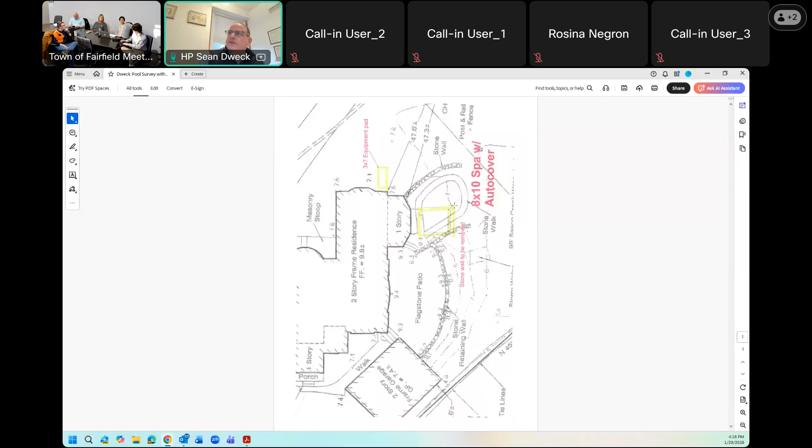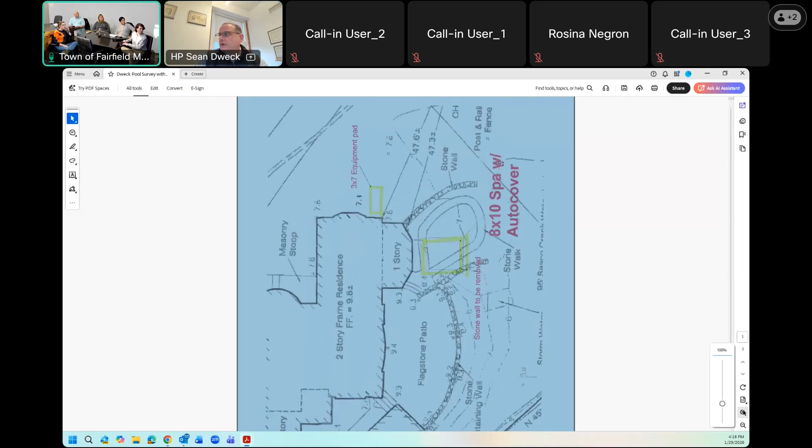The proposed location is the box that's here in yellow. I don't know if you can all see that—maybe enlarge it a little bit, and also flip it 90 degrees? I can do both. There we go, thank you.

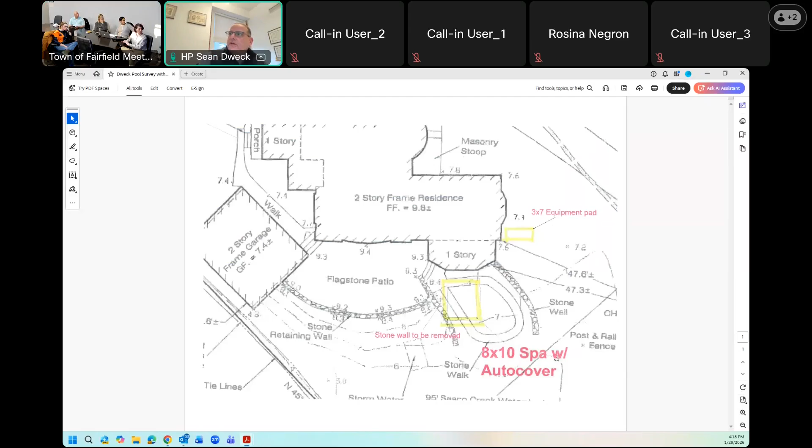Okay, that's better. So this is the house here. This is a flagstone patio, which is pre-existing. Then there's a stone wall that's maybe a foot or two here, and two stone walls, one here and one here. This is an open grass area, and all of the area over here is open grass. Alongside here is a fence that was before the commission maybe a year or two ago—it's a white wood fence that goes all the way up to the curb, basically. And then this is Pequot Avenue over here.

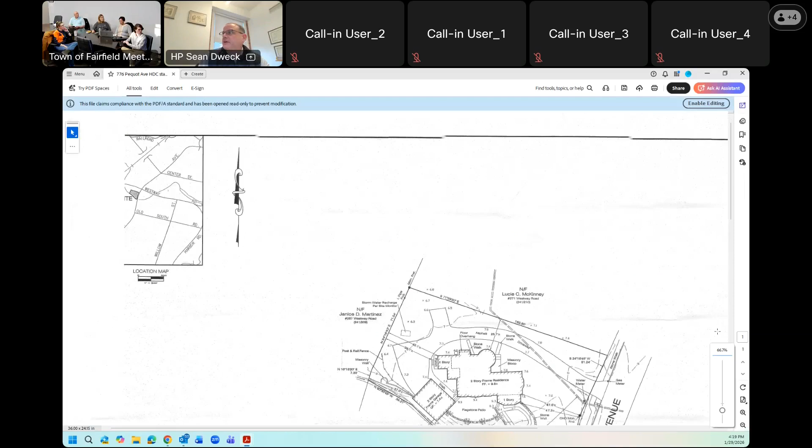That's the map that's here. I also have, just for frame of reference, the actual survey that's on file with the town, to kind of give you an idea in terms of where things are. So this is where the proposed pool would go, this is where the existing fence is, and this is Pequot Avenue over here.

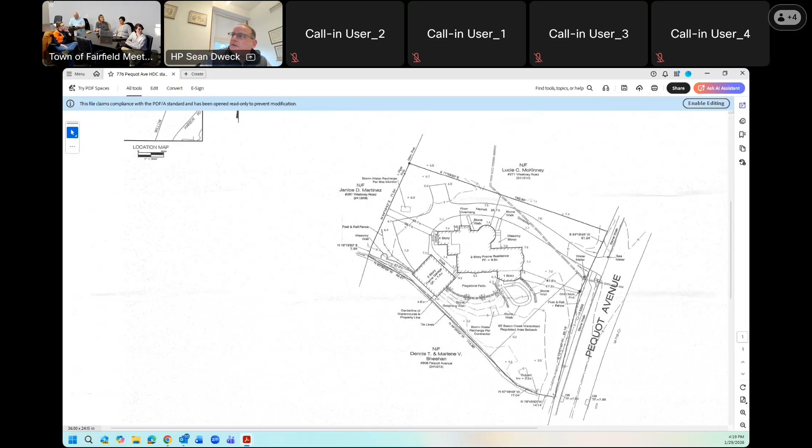Alongside Pequot Avenue, from the start of our driveway all the way up to the end of our property line, is completely covered with large evergreen trees. And then going back to the other drawing, the proposed pool would go here.

It would have an 8x10 spa, they're calling it a spa, with an auto cover, completely rectangular. The proposed location for the equipment pad would be over here, which is covered by shrubbery. As we have more plans prepared, that would all be part of the plan.

We've reached out to the different departments within the town—planning and zoning, engineering, obviously to you, and the building department—just to get some preliminary information about what hurdles we may need to overcome in order to have this done.

It appears that we need to have a minimum of a 40-foot setback from the property line along Pequot Avenue. I did a rough measurement myself, and it looks like we will be within that. But once we have the actual drawings from the surveyor, the engineer, and the pool company, we'll be able to confirm that. If not, they said we would likely need a variance for whatever the difference is.

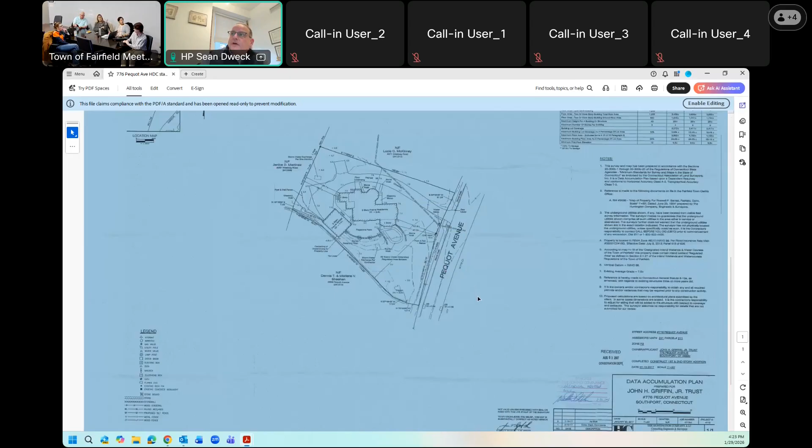One of the comments I received was that it can't be visible from the street, and I don't think that would be the case here. But obviously we can't take landscaping into account, so we have to consider: can we see the pool if those trees weren't there? The short answer would be yes.

What we can do as part of the proposal is have the wood fencing come out as far as necessary so the pool would not be visible from the street if the trees were not there. So you'd extend the fencing that's by the bottom of your driveway down Pequot?

Yes, you're correct. We'd have to talk with the landscape architect or whoever would design it. But I think aesthetically, for our purposes and the town's purposes, any fencing we put up would be closer to our property so that when anybody's walking down Pequot Avenue, all they really still see are the trees, but the fencing is there. So it'd be behind the tree line—yes.

So that was Darren Raymond Locke asking questions. Jim, do you have any questions or comments? No, I'm good, thanks. Maura, do you have anything?

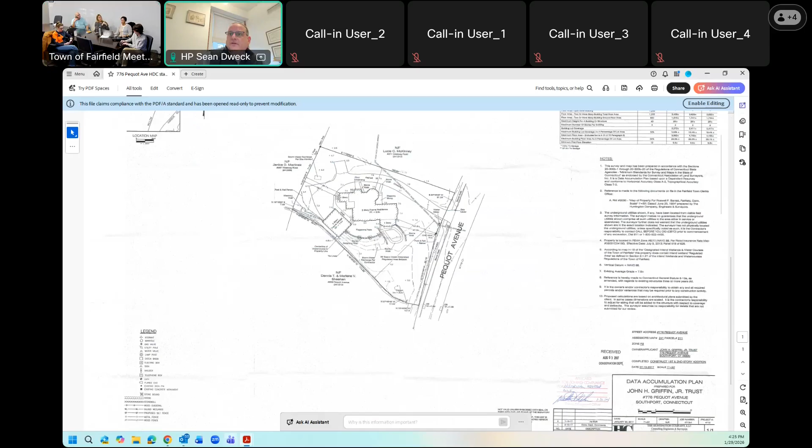If we go back to the original drawing with the colors on it—this area here of the pool is closest to Pequot. My measurement would be that from here, the closest edge of the pool to Pequot, up to before the sidewalk starts on Pequot, would be 40 or more feet.

I say that's an estimate because I have to leave those measurements to the experts, but when I went out there with the long rolling tape measure to see if we'd be within that 40 feet parameter, it seems as though we would be. That's the part of the pool closest to Pequot.

And the fence that's there is like a stockade, the 6-foot one. Yes. Would it be the intention to continue the same type of fencing?

Truth be told, I don't know. I don't know whatever requirements you folks have, we'd want to comply with, but I don't know aesthetically what would look best—whether it would be the same type of fence continuing along, or maybe something different. So I don't know is the short answer.

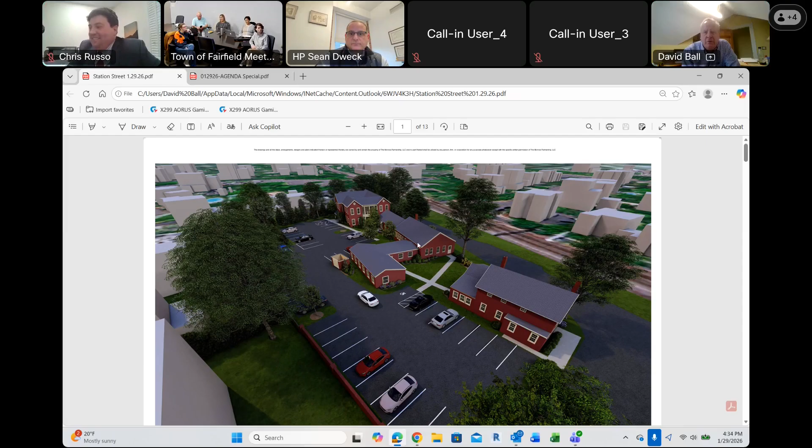Starting with the building, there were comments about the front entrance - it was a double gable. Actually, I've got a close-up view of that. We reconfigured that part of the building so now it's a single gable, and also introduced some of the other elements we talked about. For example, the windows have a sloped - I'll zoom in a little - I apologize, my mouse is acting up - but we have the windows with what I'll call a gable head to it, look carefully at that.

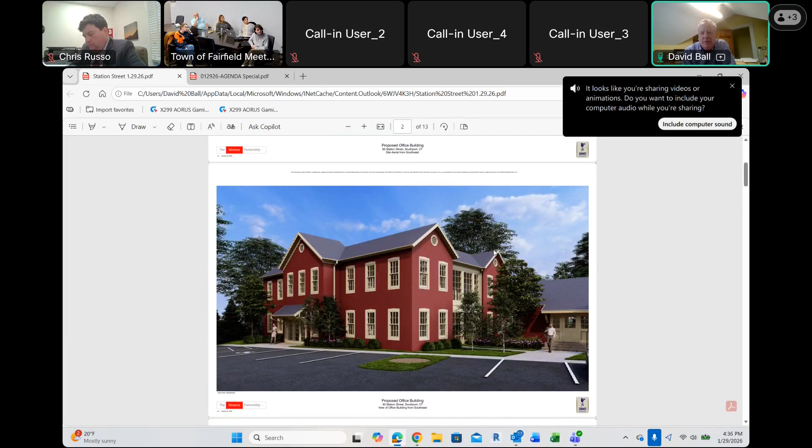And then we added gutters and downspouts, exterior lights, and the circle vent. The one thing I'll point out is at the front entrance we did add a trim piece similar to the original building as it's been reconfigured over the many years at just that part of the facade. We did not do it on the sides of the building - we'd be happy to, but we actually like this. The proportions are good, they feel a lot like the original building, and the side feels a little more barn-like, which was some of what we were dealing with in the prior design.

So this gives you a sense of the overall building with the revised front entrance. I'll scroll through the rest of the presentation, which is very similar to what you'd seen in the past - the various views around the building. The footprint of the building, we kind of pushed and pulled that one element, so it's exactly the same square footage as before. We added a few historical pictures - we dug up the pictures from the Northrop brothers, which is the one on the left here, and then some of the others that we handed out in the meeting the other day.

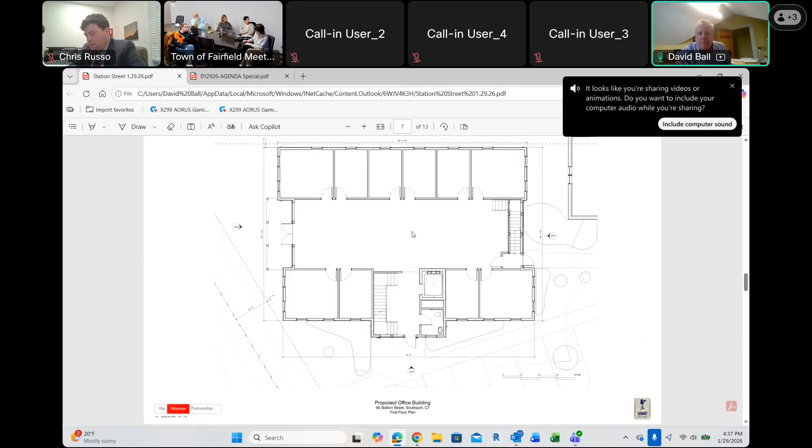And then there was - so here's the floor plan. This is all squared off now. It really doesn't change the floor plan in any meaningful way. The roof plan, the same. The elevations - this is the front entrance in straight elevation. Bear with me with my mouse, but hold on - so that's the basic, pure proportions of that front entrance.

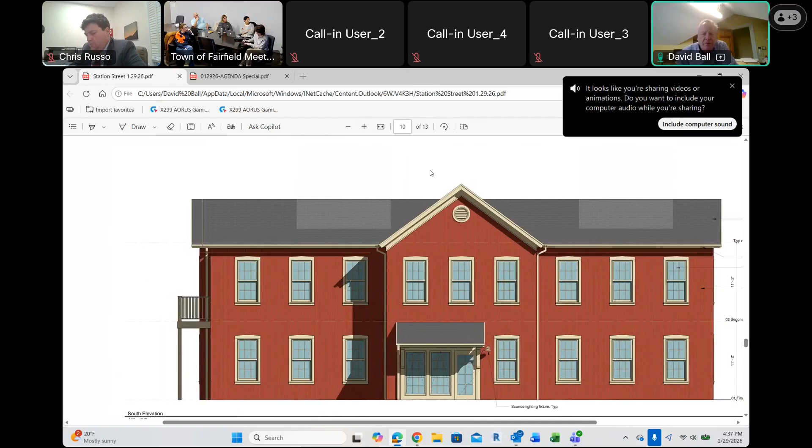And then the other elevations, aside from the windows and the gutters and a few other things, have not changed much. We did add a page of what the dumpster enclosure will look like, and it's really meant to be in character with the remainder of the site. So it's the same vertical painted cedar siding, painted wood trim, kind of barn doors for accessing the material.

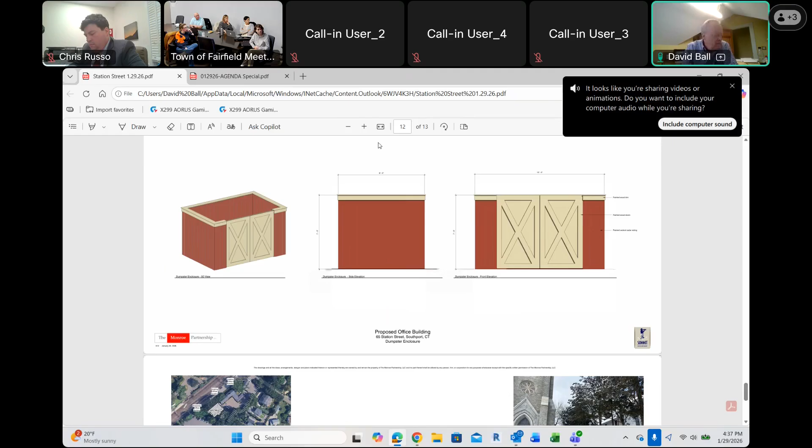And then there was a handful of other questions. One was, how does this compare to the church height? So we went out to the site. The photographs on the right were taken roughly last week. You can tell because there's not a foot of snow on the ground.

The height of the church, the main gable, not the steeple, is approximately 59 feet. The height of our building, per the zoning regulations, midway up the gable, is 26.4 feet. So it's roughly half the height of the church. And if you add the full height of the gable, it's another 4 feet. So it's 30 feet versus 60 feet. And we just don't believe that this will be visible from the street.

We took a picture in between the church and the house to the side towards the site, and even in the wintertime, there's a number of evergreens there. I know you don't consider trees as far as you want the architecture to be right, but we just don't believe this is an issue.

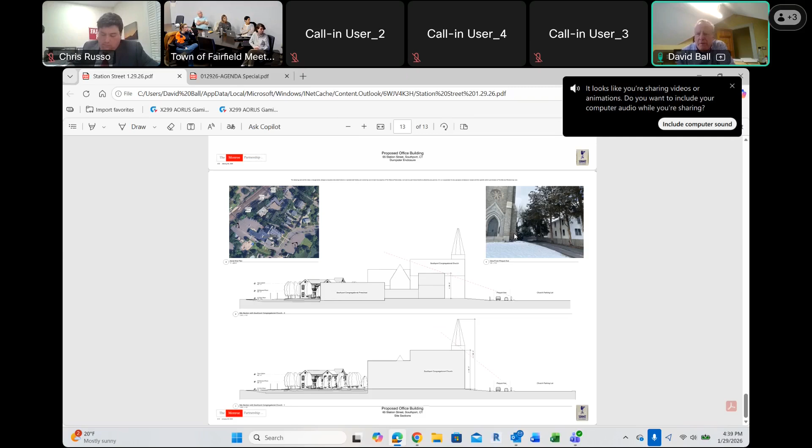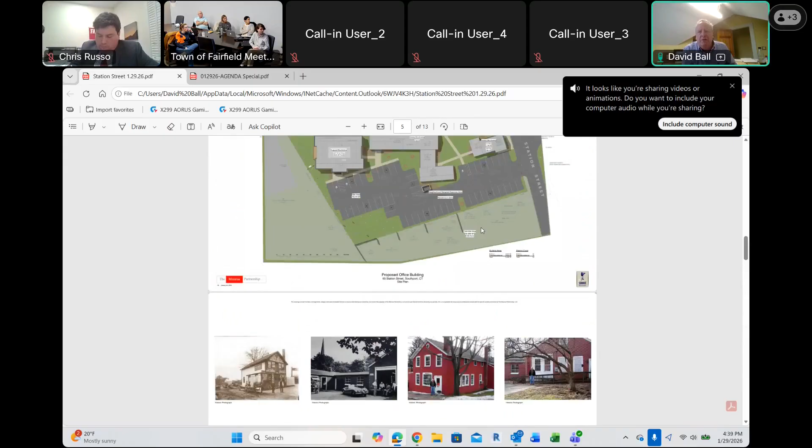And then, beyond that, that's most of what we're presenting as a change to the drawings. There was a number of other issues that came up in the meeting, which I'll talk a little bit about.

We're working with a civil engineer. Ideally, the site is not that sloped, and ideally we can eliminate the retaining wall. If there is a retaining wall, we will present that to you properly. We'll have to have a reinforced concrete base to it, but then we will put a veneer stone on it. And the height of that wall will be 2 or 3 feet. It's not a very high wall.

And we're working with the landscape architects to clean up the landscaping plan, just to give you a sense of what we're up to. It's a lot about, it's very nice landscaping around the building. And then along the perimeter neighboring properties, we will have lots of screen planting.

In the last meeting, somebody brought up that we had one image of a stockade fence. That was meant, that's an existing fence and it's on the neighbor's property to the south. That was just to give a sense of the views from surrounding the property, and we've since eliminated that.

And I just wrote down notes from the last meeting. So there was some comment about an ADA sidewalk, an accessible sidewalk. And this building will be fully accessible, so I'm not quite sure what that was about.

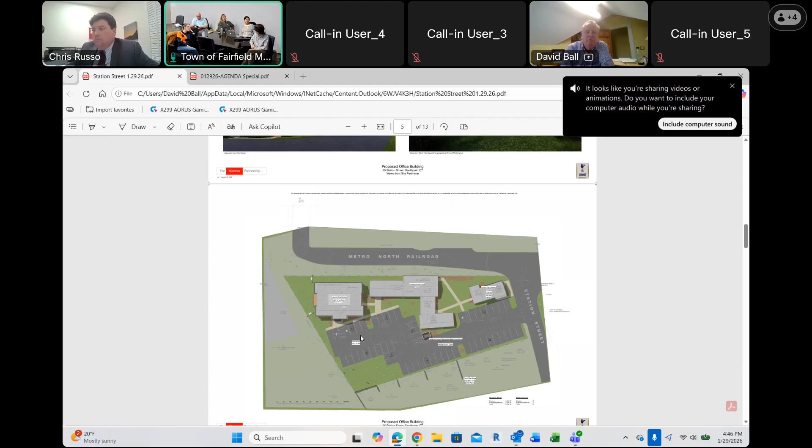I think, unless you have other questions or comments for the commission? I don't, Chris. No, I don't. Thank you for your time on this, appreciate it. I appreciate everybody's input, and I think it's a better building because of it. It has just a very different, nice feeling, it's funny, just those little changes make it change a lot. I agree, and I kind of like the way it sort of bookends between the sort of bar-like structures in between, so it's a good reference to the two.

Well, thank you very much. Thank you for doing that.

Thank you, everybody. The next item is Rose Hill on Harbor LLC, 385 Harbor Road, Southport, Connecticut, for a property located at 385 Harbor Road. Is there anyone here to present this pre-application? Yes, Chair, members of the commission, Chris Russo again with Russo and Rizzio here on behalf of the applicant. I have Bob Tucker with me. Bob, I don't know if you're able to share, could you start sharing your deck?

Sure, the site plan. So this is one that has not been before you yet. It's 385 Harbor Road, so we're on the harbor side of Harbor Road with this application. This is a property with a beautiful single-family dwelling, I'm sure a lot of you are familiar with it. It was built in 1854. I've had the pleasure of being inside this home, it's just as gorgeous inside as it is on the outside. The property has a detached accessory cottage slash garage, and there's a lot of beautiful landscaping throughout this property. It's a rather large one, with some grades that drop pretty significantly down to the harbor. We're here asking for an addition to that detached building.

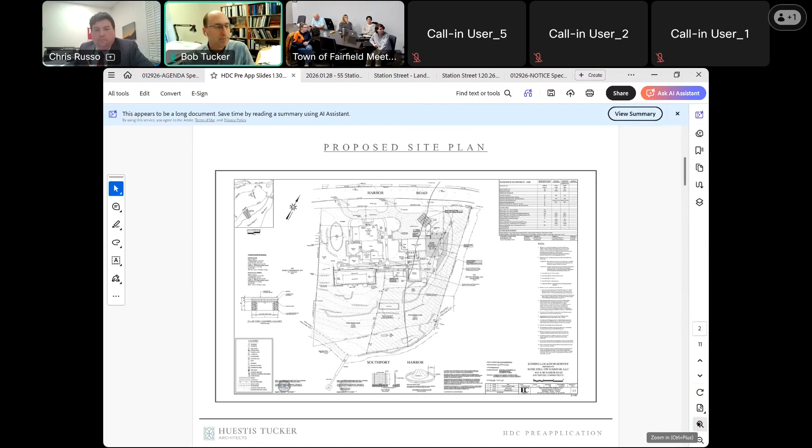There's some trouble sharing the screen over WebEx, with back and forth about who should share and how to switch presenters, followed by apologies for the delay while the screen share gets sorted out.

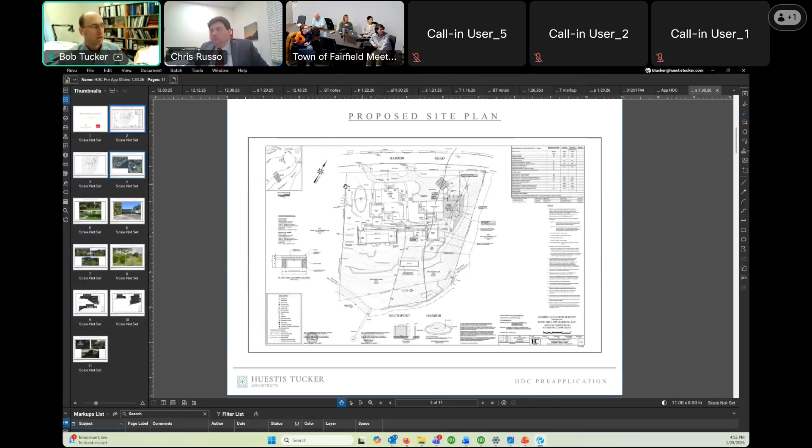So, site plan - let me just zoom in. These were submitted; I think we submitted the site plan and the elevations of the building. I've got a little more existing conditions and stuff to show you.

But here we have the existing garage with cottage or apartment above, and this is the proposed addition.

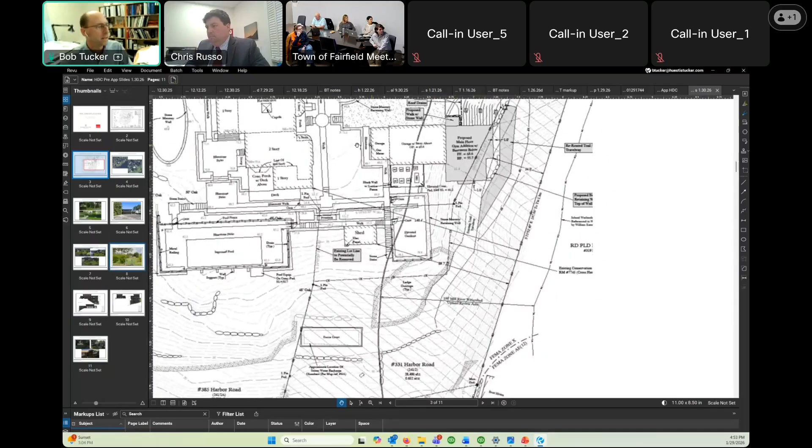One of those trees will come down, but the plan right now with the landscape architect is to keep the rest and plant others. The first two near the building will have to come down, and we'll plant new ones at that end and the other end to bookend it. I know also you can't consider the vegetation, but...

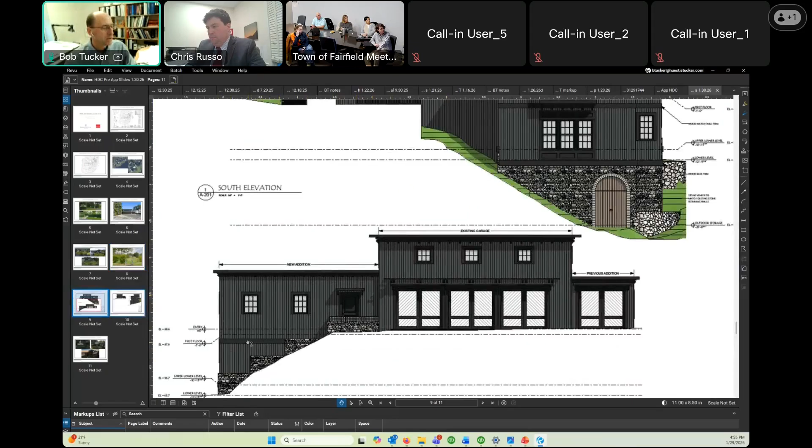So these are the elevations. As you can see, we'll have matching materials, colors, etc. The entrance is here, and then there's a lower level. Because of the grading, it gets pretty tall in the back here. But we are planning to use nice stone materials to match the other stone of the raised garden, and just try to keep it from looking like something that shouldn't be there.

The idea, and the reason for this door, is to have some storage for garden equipment and possibly waterfront toys. But it's meant to look like an old cellar on an old house. So that's the idea there.

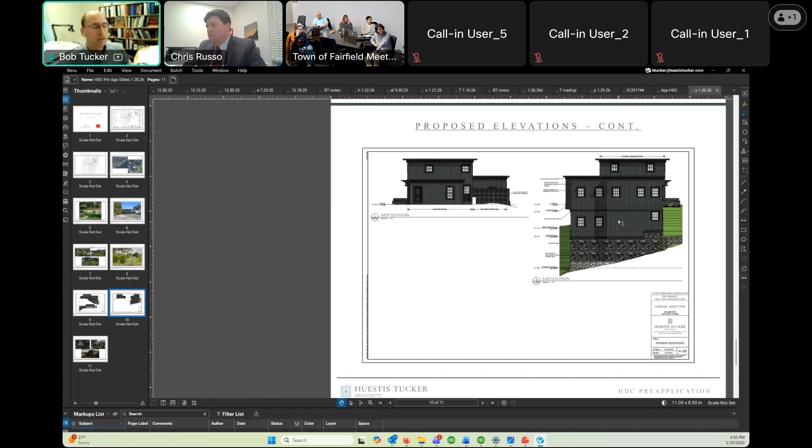And then on the other side, again we've got this tall side because of the grades. That's kind of the cards we are dealt. But we are within the zoning regulations for height. And also you can see we've really tried to keep it subordinate to the existing main part of the garage.

I think that's all. Chris, did I miss anything? No, I think that's a good intro into it, and we'd welcome your feedback on this. Okay, thank you.

Darren: So a couple things. I'm glad you'd stay on this page. For me, I understand that the cellar door is meant to look old, but it looks discordant to me. It looks like you're trying to have an old door on a building that feels very modern, a modern interpretation of like an Italianate structure. That's just my first reaction to it.

The other thing I would say, on that top view in the back, is something that always stands out to me: the number of different types of windows. You have 6/6 on the top and the middle, a 6 light underneath that, then a 9 light, and then a series of larger doors. If there's a way, doors aside, to find some consistency with the existing windows on the main block of the garage on that new addition, that would be really great. Because right now it just looks like a bunch of different windows, and design-wise, that looks odd to me.

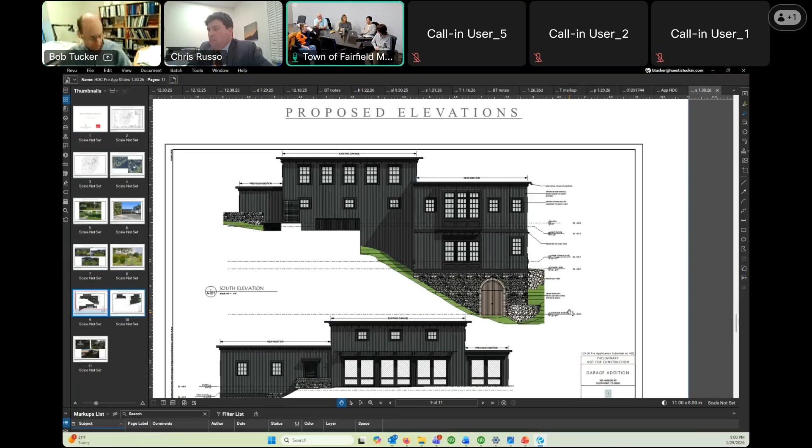I'm good with the door on the bottom, but I'd like to see another version like you had mentioned. I think you took great use of the grading. I know this house intimately and I see it by the water a lot in the summer, so I think this fits in and blends in perfectly.

Laura: Great, I'm trying to catch up. So the picture we're looking at, the existing is on the left and the 3-story new addition is to the right, facing the water. Bottom picture with the more open doors, that is facing the street, Harbor Road.

Harbor Road, that's the front. Oh, so those are the garage doors. They're not open, they're wood. So this is existing and that's existing. Okay, so when this was built, the original parts were built in 1993.

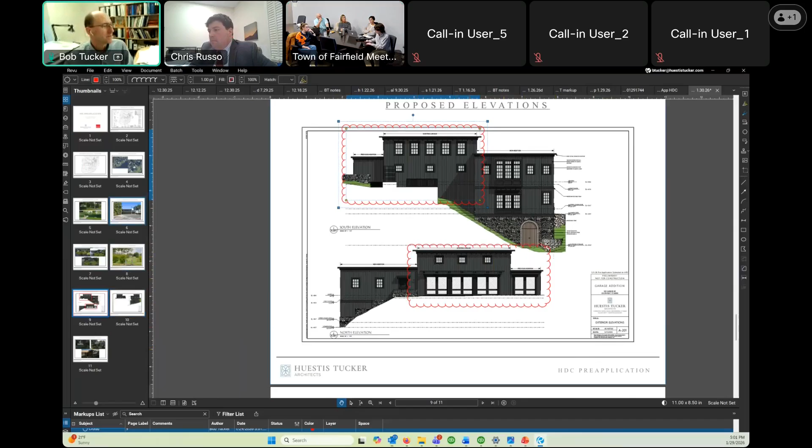How would you define the architecture that they used at that point? Was that Italianate or what would you have called it? I think the comment that was made, a modern interpretation of Italianate, is kind of right on, because it has the brackets and the detail, but these elements of it were built to fit with the house and yet stand apart with the vertical board siding and the gray color.

Which I like about it, it's so simple from the driveway side, and from the other side, so nothing is changing on the existing from the water side. That's the way it looks right now.

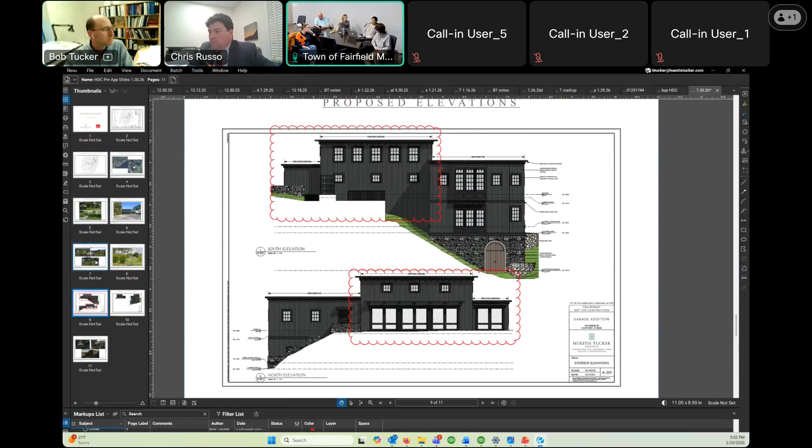Okay, so I think based on understanding that, I agree with Darren's comments of just kind of calming it down a little. You can see the back of the existing right here, so we're just adding kind of below here and out, then dropping down the hill.

No, and the lines, again, that's a great picture because looking at it from here, you just see how the lines talk to each other without trying to match. That's an amazing house, it's incredible.

Chris. Lucky to do a little work inside it. Yeah.

As for me, I definitely agree with the comments that Darren mentioned, that the cellar door really does not fit, and the same thing with the windows. It will be good to coordinate and make everything more harmonious. Okay.

All right, we can do that. Any other comments, questions? No, I mean, I think tucking it in on that side was the best option you had, really. Yeah, we talked a lot about it, it is the most out-of-the-way corner and it's kind of a utility building.

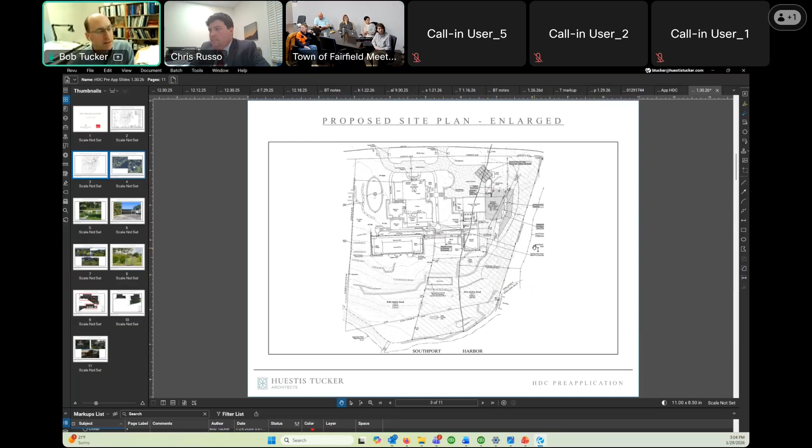So I will admit that there are going to be great views from there, which is partly why we have these big windows, and I will try very hard to make that balance between being able to enjoy the views and also having it fit in with the rest of it.